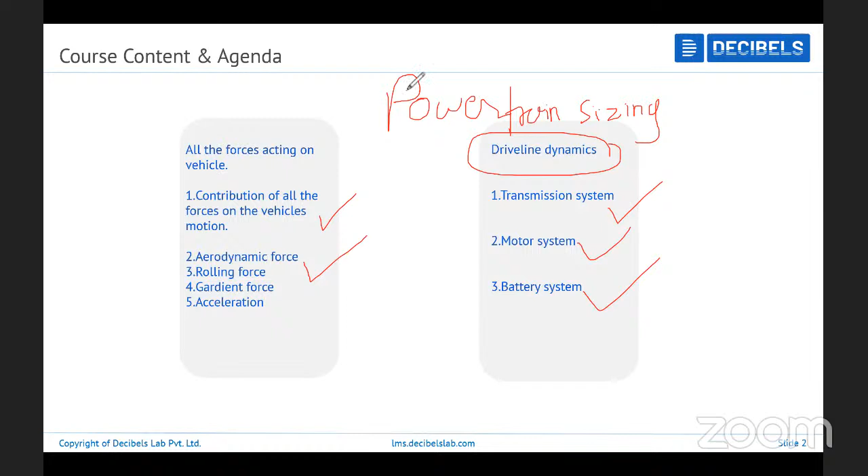So with this, just go further. So here, there are so many different approaches, what I'm going to... hello, sorry.

So if you talk about the sizing of the powertrain, there are many approaches. Here we'll be discussing an approach called wheel to well analysis.

So this will be like your wheel side. You can see this particular block diagram. This is whatever the vehicle longitudinal dynamics, this is nothing but at the wheel side. This is your source.

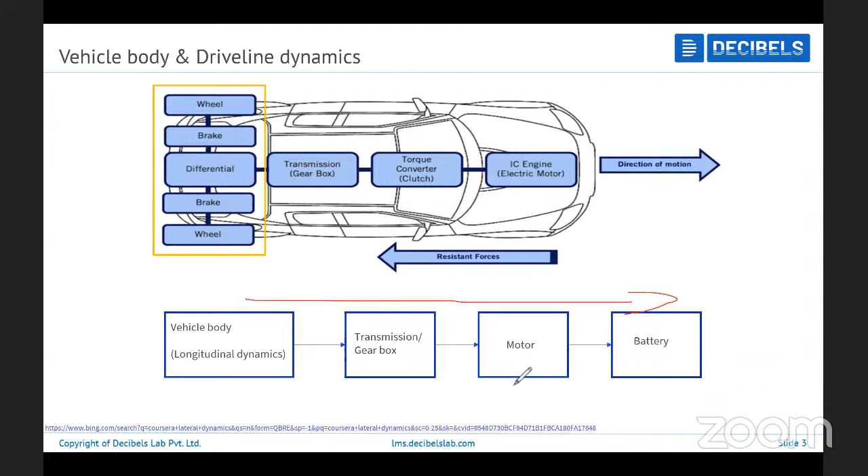So this is like a backward approach, you can say. So getting to know what.

So there are some basic derivations of the equation, related to the vehicle, that will be vertical, longitudinal and lateral. But here we only discuss longitudinal, because we are just concentrating on the front and back motion of your vehicle, in one direction itself. We won't be concentrating on turning and all that stuff.

So here this is a basic equation, we're just balancing the forces. With the help of Newton's equation, that is F equal to m into a, we'll be deriving the whole thing. So if you see this particular equation, this is your required force, and these are your resistive forces. So with this we can get to know what is the required force. I'll be discussing in detail what is aerodynamic force, gradient, rolling, all this stuff. So don't worry about these particular equations for now.

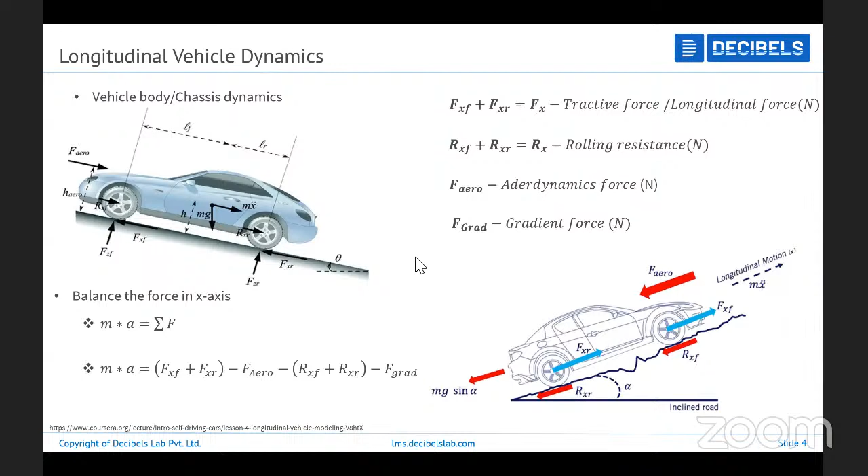So we just discussed what are the forces acting on your vehicle. So how are they going to contribute, in what percentage? We'll just look into it. So if you see this particular pie chart, you can see 45% of it is contributed by the aerodynamic force, some tire rolling which is nothing but rolling resistance, and the rest others. So the major contributor is the aerodynamic force itself.

And you can see the force versus the vehicle speed. We have mentioned rolling resistance, aerodynamic forces, all this stuff. We'll look into this graph in detail.

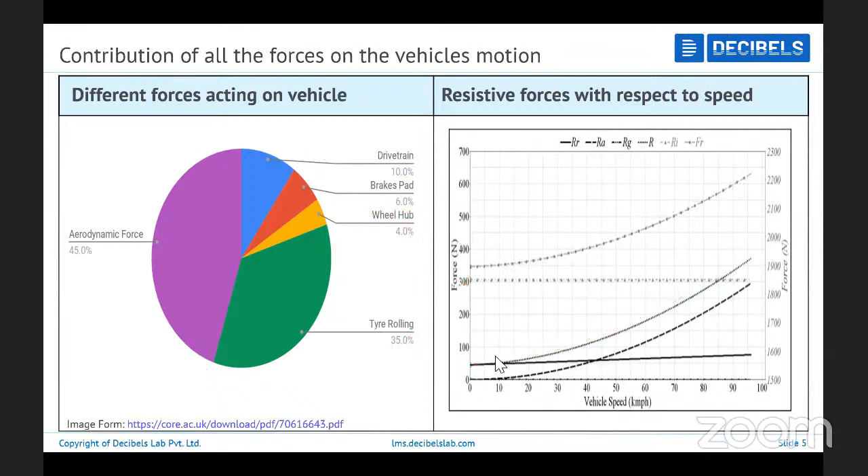So here, we'll start with the rolling resistance. We define it as a kind of resistance we encounter when a surface is in contact with your wheel.

So what are the factors affecting rolling resistance? There are many factors, like tire pressure, which is going to affect it. This is because if you don't maintain the proper pressure, let's say the tire is completely flat, so if this is the width of your tire...

Some millimeters, let's say. So if this is the width of your tire, and the tire is completely flat, the whole part of your tire is going to come in contact with the road. So the contact area between the tire and road surface, in terms of width, is going to increase. This is how you have to maintain the tire pressure, or how it's going to affect the rolling resistance.

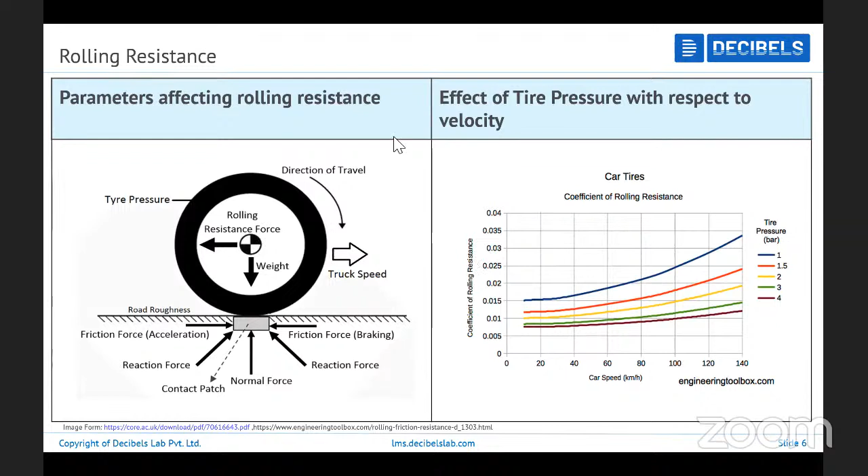So we discussed some parameters: one is the design of your tire, and weight is also a parameter - even the weight matters - and the tire pressure, and one more is the material, the surface material, and the temperature.

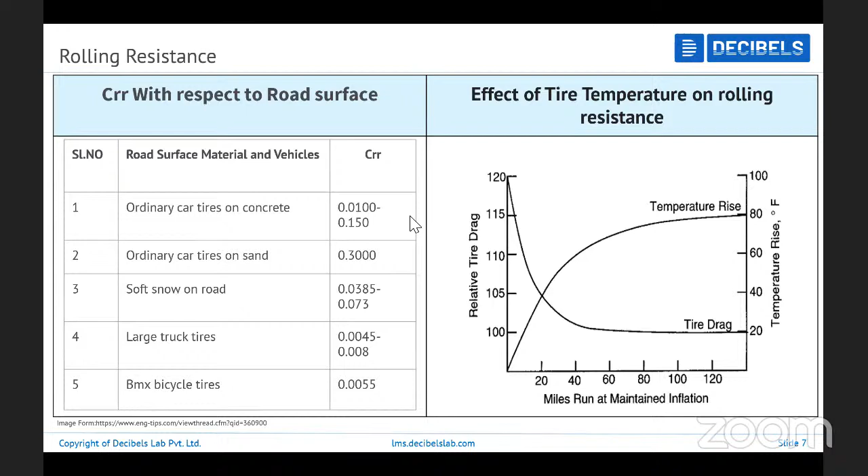There's also the material of the tube. Earlier we discussed the road surface material, like concrete, sand, road. Here you can see different materials of the tire tubes.

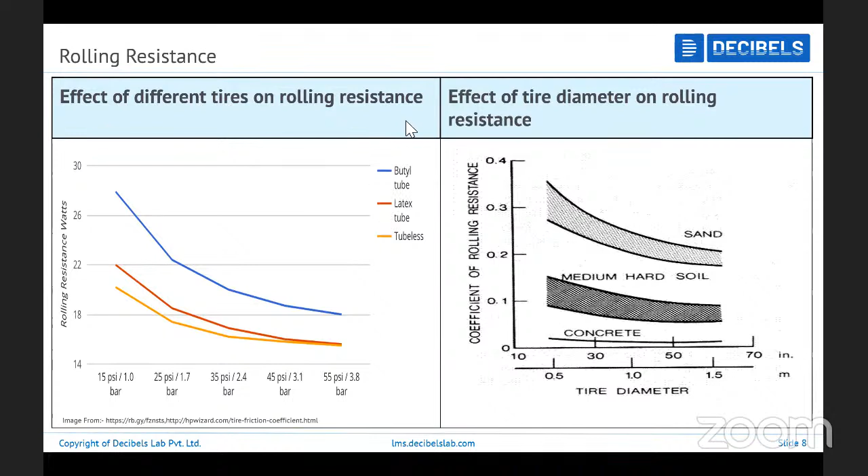Here, GVW is nothing but gross vehicle weight, which includes gross vehicle mass multiplied by acceleration due to gravity.

Gross is nothing but vehicle mass plus driver or passenger mass. If you include the driver and passenger mass, it gives you gross vehicle mass, and if you multiply the gross vehicle mass with acceleration due to gravity, you get gross vehicle weight. So for the gross vehicle weight, you are going to multiply...

...the CRR value, that is the coefficient - this is the constant term in the generic equation. In reality, this varies with respect to the tire pressure and the velocity at which you are moving. You can see other equations where it is dependent on pressure and velocity, so it depends.

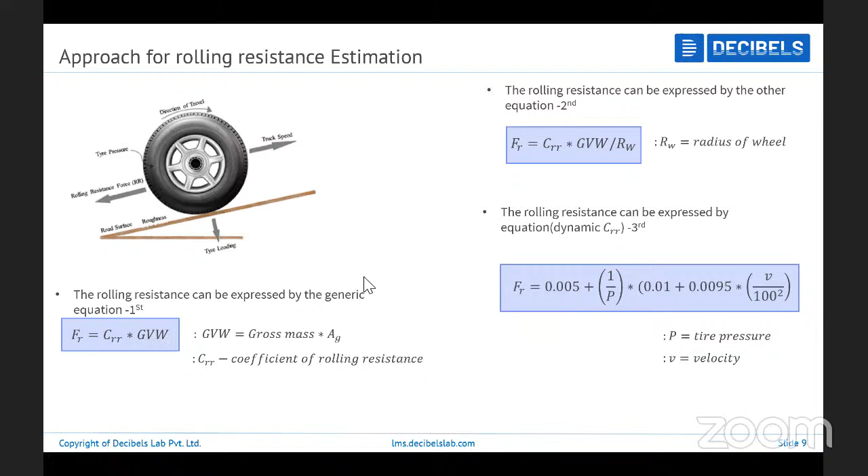So let me clear all the diagrams. Now, like one resistive force, let me write it here itself: rolling, aerodynamic, gradient, and one more, acceleration.

We'll just look into how we can make use of this. So we have just looked into the rolling resistance, defined what is rolling resistance, and also defined the parameters affecting the rolling resistance. We also looked into the equation, how we can estimate or calculate the rolling resistance. So the same thing, we are going to look for aerodynamic force itself.

Okay, let me clear. So we'll start with aerodynamic force. If you want to say what is aerodynamic force, how it's going to affect your vehicle body, or how it's going to act as a resistance force to your vehicle, we'll look into it. So we'll come back to these equations later. We'll just try to look into some parameters.

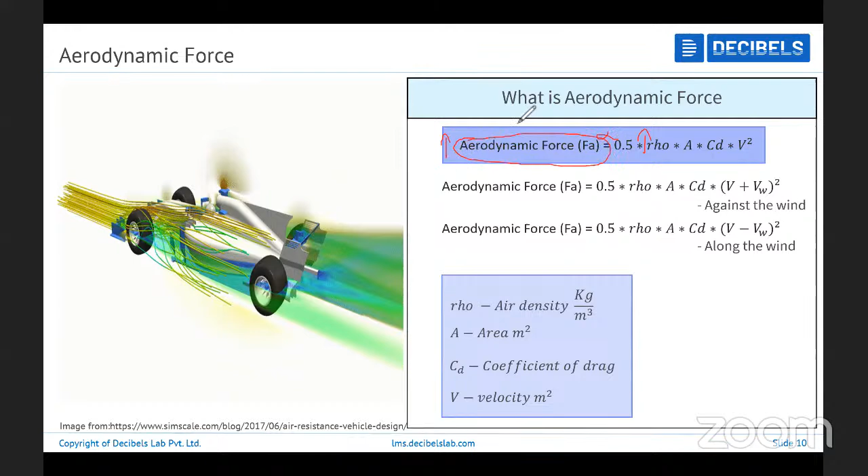So we just look into the factors affecting aerodynamic force. One thing I need you guys to note here: all the parameters are directly proportional to the aerodynamic force. So if any one of the parameters increases, obviously the aerodynamic force is going to be influenced.

So here the parameters, first we'll talk about drag dependencies. We were discussing CD, that is coefficient of drag. So coefficient of drag will depend on your vehicle shape. Here there are some general shapes, so for different shapes you can see what the drag coefficient will be. Whenever we talk about a vehicle, or a plane, a rocket, all those bodies are almost a streamlined body, or like a streamlined half body kind of.

The purpose of a vehicle manufacturer going for the streamline shape is because of having a very less drag coefficient compared to other shapes. So if you look into some high performance car, the drag coefficient will be very less. If you look at some lorries or buses which are having an almost flat surface, you can see the drag coefficient will be having a higher number. So it depends on what shape we are going to make use of for the manufacturing. And the velocity is directly proportional to the force; in the equation we see that all the parameters are directly proportional to aerodynamic force.

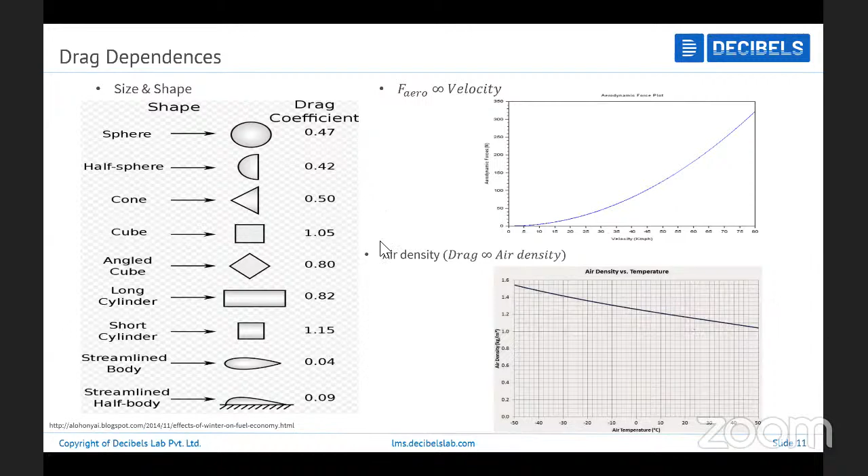So again, in the drag coefficient, there are some different types of drag, like skin friction drag, pressure drag, interference drag. We can take this as your assignment part, just look into what these things are.

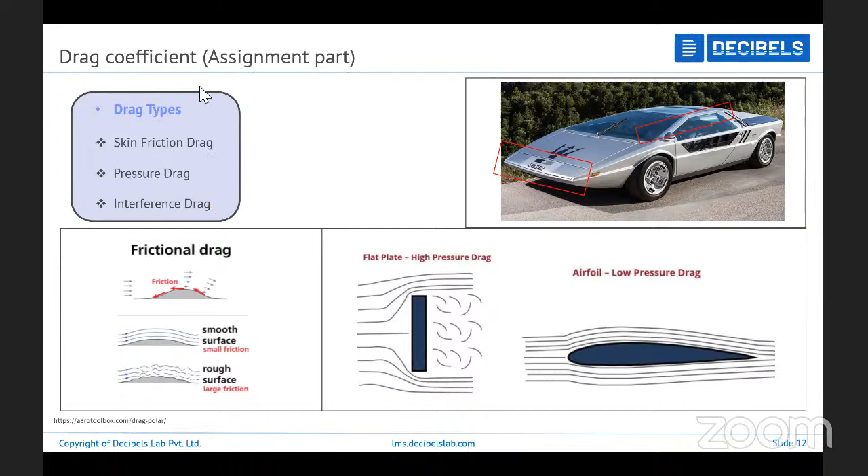Just quickly move to the next part. So as I was discussing about how to estimate the CD value, we know the equation for aerodynamic force, that is 0.5 rho CD frontal area, and transferring all the parameters to the LHS, it will become CD equal to AF divided by 0.5 rho, frontal area and V square.

This V square will be the velocity of your vehicle for this instance. In some tests, a kind of wind is blown over the surface of your vehicle. Now these parameters - rho, frontal area and aerodynamic force - are fixed values, and with these values we are going to estimate the CD value, which is non-dimensional, dimensionless. So this is how they make use of it.

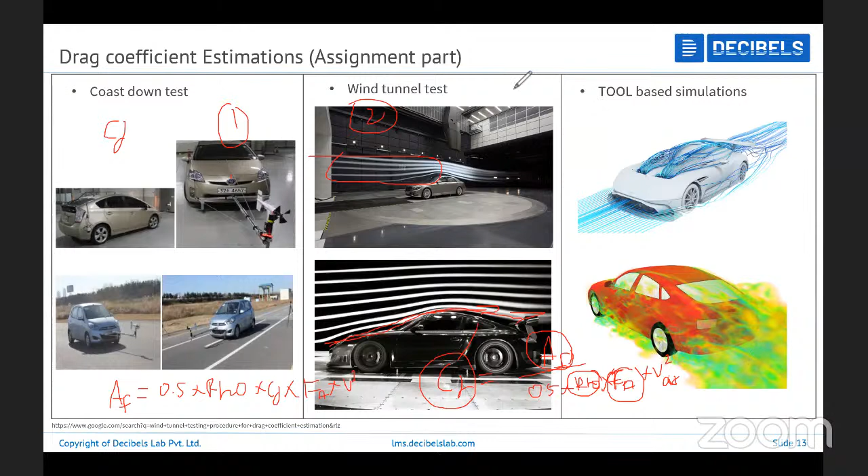These two are real-time, and this is completely on the tool base - CFD simulations will be considered. So as I was discussing the equation, just make a note of this particular equation which we'll be using. Don't worry about these equations.

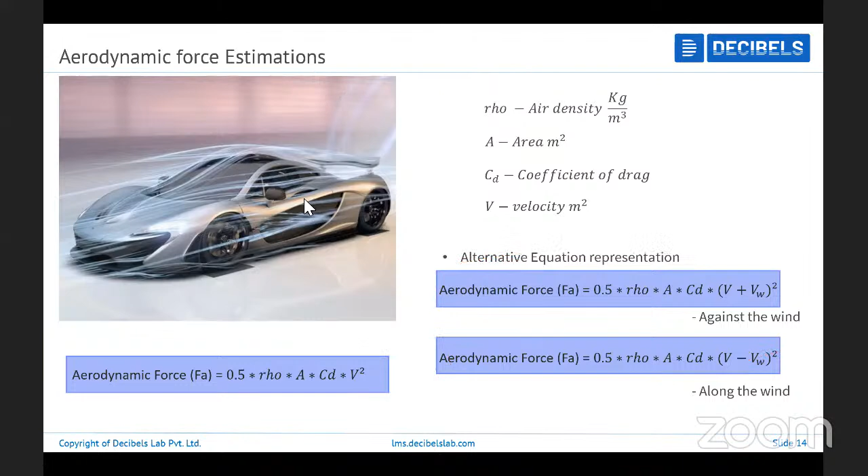Now if you talk about gradient, as I mentioned, if you're moving on a flat surface, minimum effort has to be put by the vehicle. If there is an inclined road, we have to put in more effort, because it will become against gravity with an angle.

So for your vehicle, if it is on a flat road, the weight will be completely with 90-degree downwards. Again, if you are on an incline, it has to be resolved with some angle - that's where we make use of it. This is how we can define the gradient, so just look into that equation.

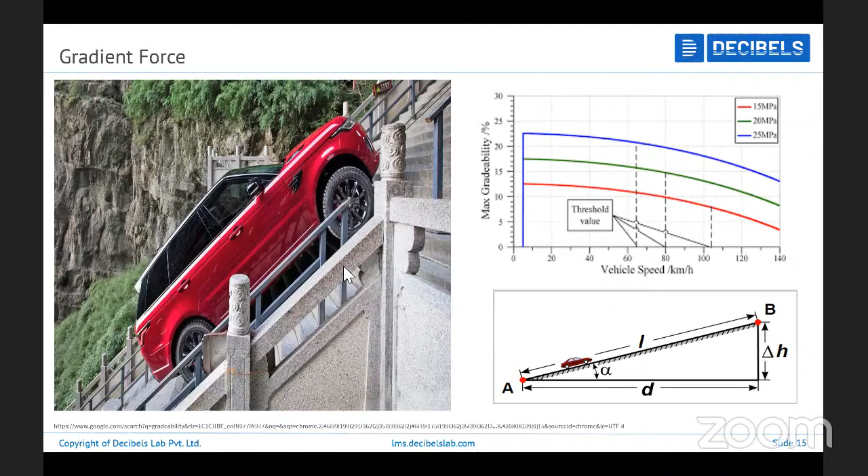Before going to ARAI standards requirements, just take a look here. These are mentioned in percentage.

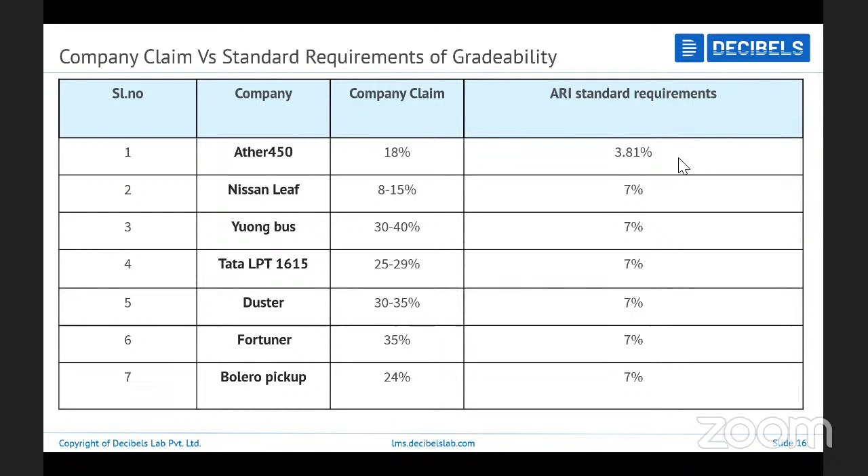If you're traveling in an uphill condition, you have to put in effort. If you're coming down, even if you don't accelerate, because of the momentum, it will keep coming down.

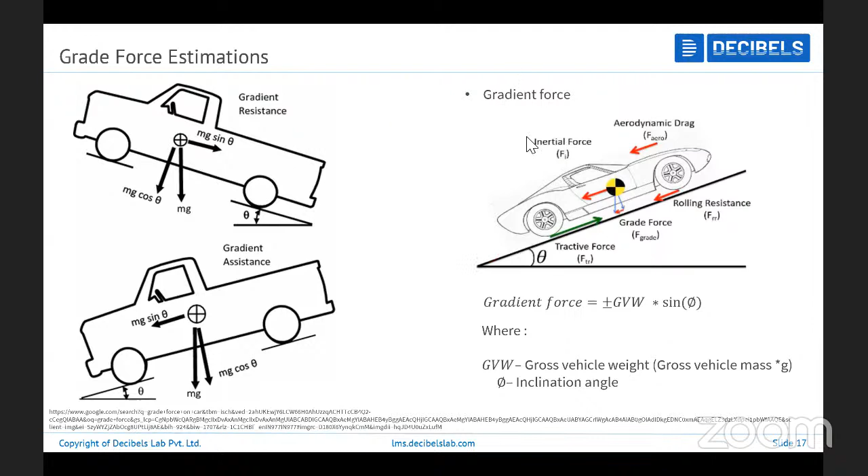So these are some set of equations. We just looked into rolling resistance, aerodynamic, and gradient. Now we'll look into the acceleration force.

So here we are going to include the acceleration force in terms of sizing. We should know how much acceleration force has to be produced. First, we have to make a consideration while calculating the force requirement.

So the force requirement has to help overcome the requirements - let's say initial resistance, static resistance, and after that aerodynamic resistance, rolling resistance. If grade is considered, then grade resistance. So first thing, it has to overcome all the resistive forces.

Next, it has to produce enough force so that it can move with the desired velocity.

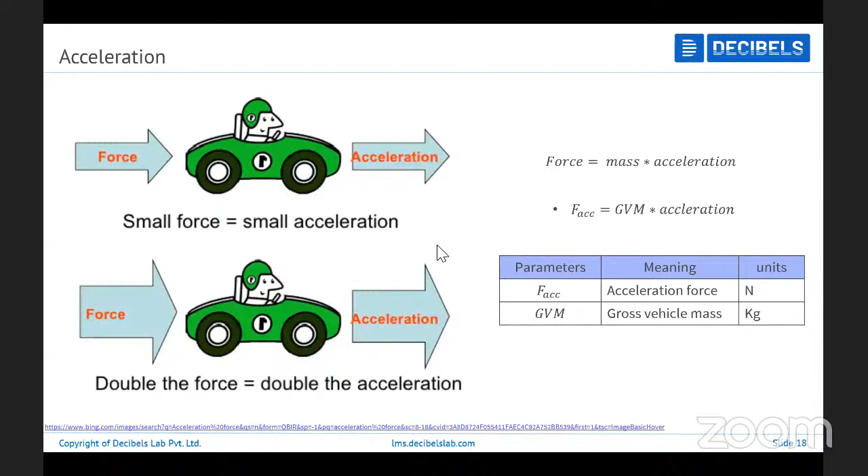So you might be thinking, what is total tractive force? Total tractive force is the total force required to overcome all the resistances, and to move with the desired velocity.

So here we are going to add all our resistive forces - F Aero, and so on - to get the total tractive force.

The total force multiplied with the wheel radius, we'll get wheel torque.

If you consider wheel to wheel analysis, you will get to know wheel torque and also the wheel speed.

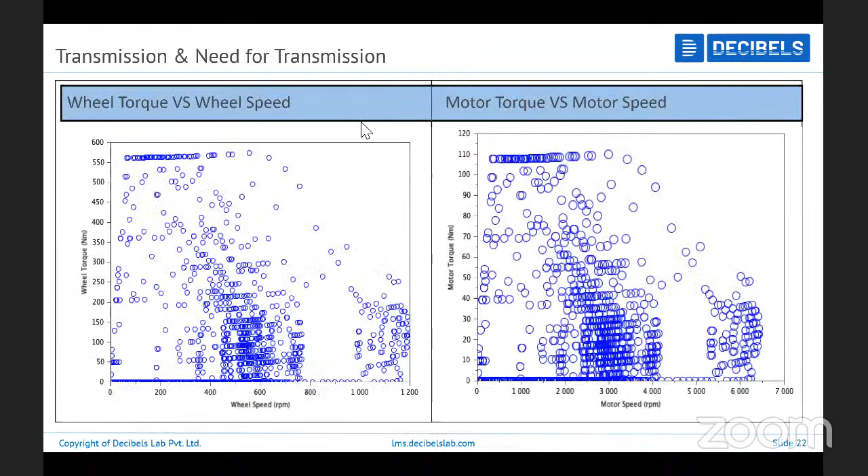So if this is your block diagram: vehicle body, transmission, motor, battery. The output of your vehicle body is wheel speed, and the output of your transmission system gives you motor torque and motor speed.

So this is transmission modeling - we use these equations. You have to size this gear ratio, and multiply with wheel speed to get the motor speed. Wheel torque divided by gear ratio, divided by some efficiency (transmission efficiency), gives you the motor torque.

So if you talk about efficiency, consider this block: from source you are supplying some power, say 100 watts. Here you make use of 90 watts, and the rest 10 watts is a loss. So this particular system is 90% efficient.

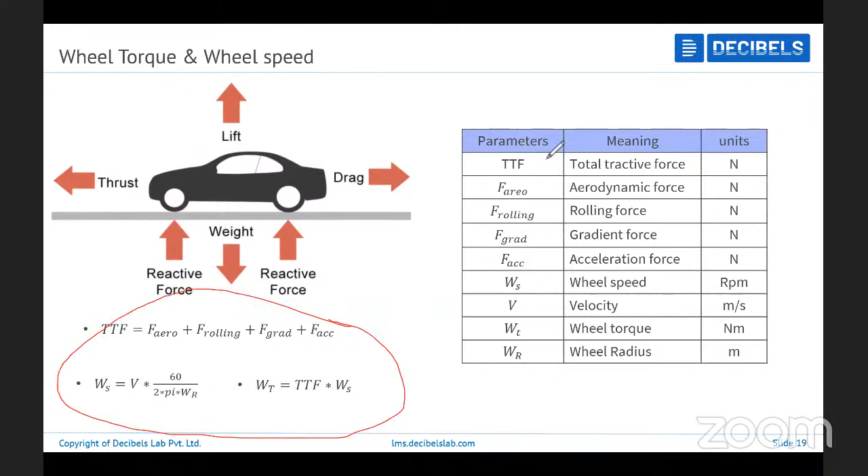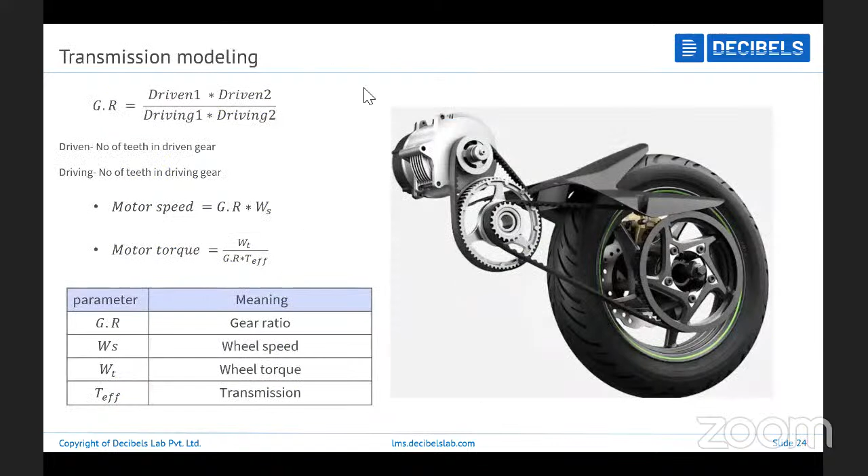Next, with known motor torque and motor speed, we can go for estimating the motor power.

So the block diagram: vehicle body, transmission, motor - here you get motor speed and motor torque, and with this you can calculate motor power.

Using the simple mechanical equation, this is your motor power: 2 pi N T upon 60, where N is motor speed and T is motor torque. The 2 pi upon 60 is just for conversion to RPM. So here you get the motor power.

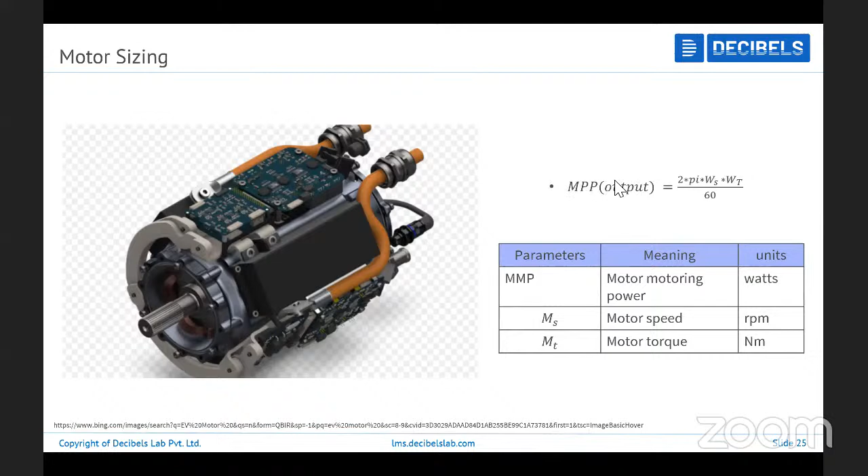Let me show you here. With this equation, you are going to estimate the motor output power, and later knowing the motor efficiency, divide the motor power with the motor efficiency to get motor input power. Then motor input power divided by motor controller efficiency, you will get battery power. So this is about the component sizing, basic equations you can say.

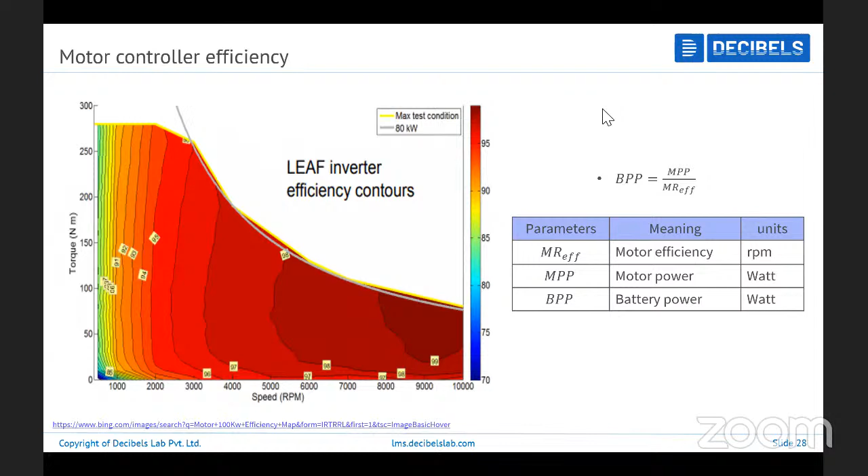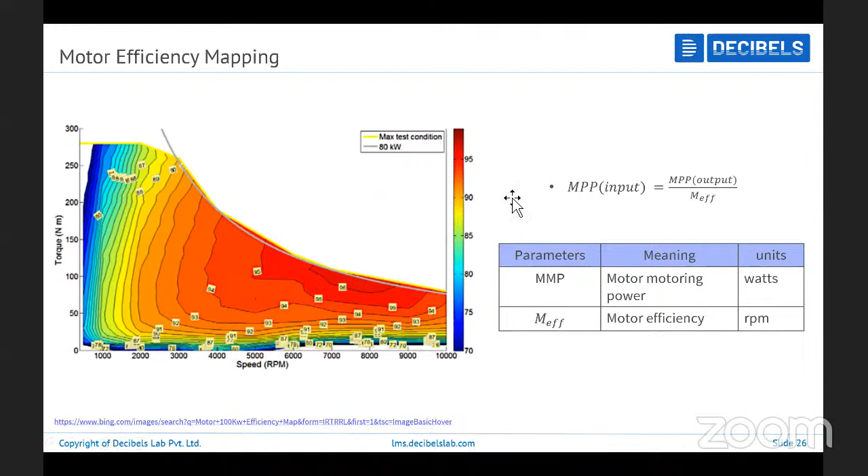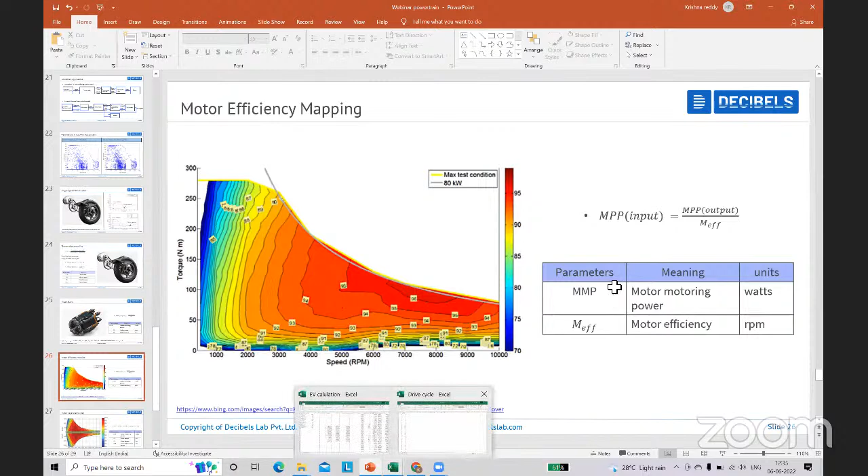I'll quickly go to the calculation part. I hope you guys have received this file. Considering that, I will just go on solving some parameters here. The equations which we just now went through, we'll be using the same equations, we'll try to import that equation here and represent it in Excel sheet format.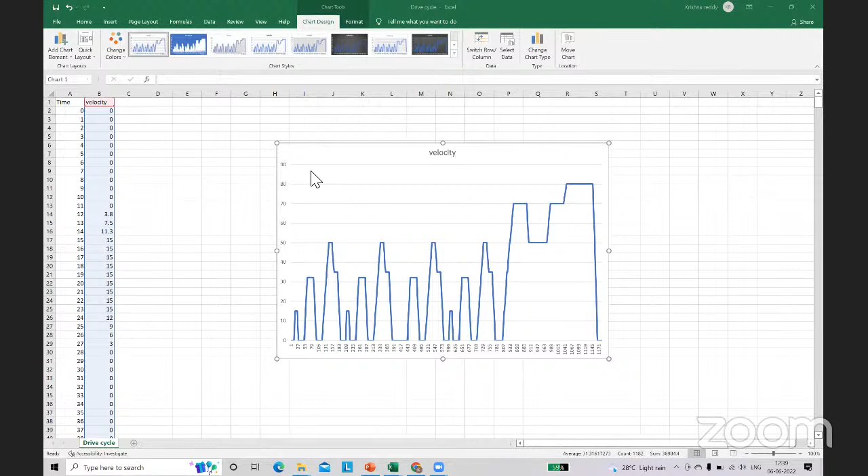So using one particular velocity, we can estimate the energy required, like motor size and motor torque. We can also calculate speed. But if you want to include the varying speed, you'll have a varying motor torque and motor speed, so from that we can get to know the continuous torque requirement, the peak torque requirement, and the mean torque requirement.

So what I'm going to do is quickly put some vehicle parameters here. Input parameters, values.

I'll be considering V mass, that is vehicle mass, 191. Driver mass, 70. Wheel speed, so wheel radius, 0.1524, in meters. Mass and driver mass are in kg.

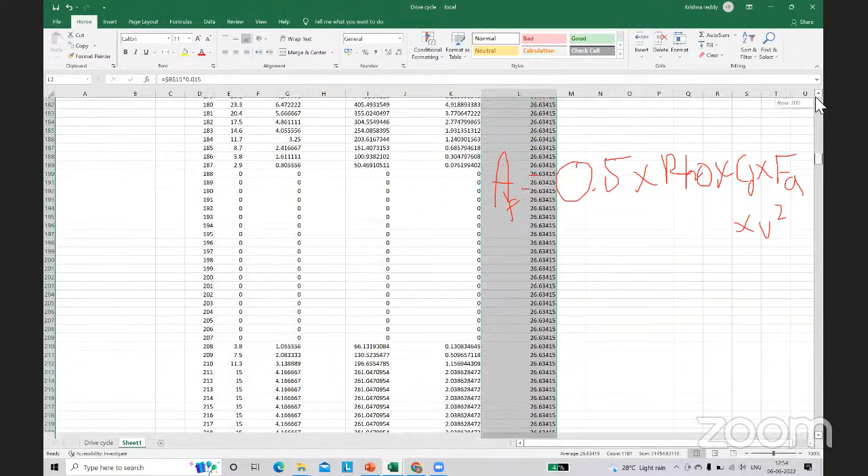Okay, let me bring like gradient. It will give you 0 because we have considered gradient angle as 0. So we know GVW multiplied with sine theta, so it will be in radians, later convert. So whatever the angle is, 0, sine 0, you will get 0, right? So multiplying anything with 0, you will get 0 at the end. So gradient force will be 0.

Including here, like adding the 0 to some number doesn't make any sense, so we'll just try to neglect this one. Now we'll try to bring acceleration force.

So we should be knowing how to calculate acceleration from the velocity. If we define what is acceleration, it is a rate of change of velocity, meter per second square.

So if we define, let's say v2 minus v1 divided by t2 minus t1, this gives you acceleration. Multiplying with the m, we get acceleration force.

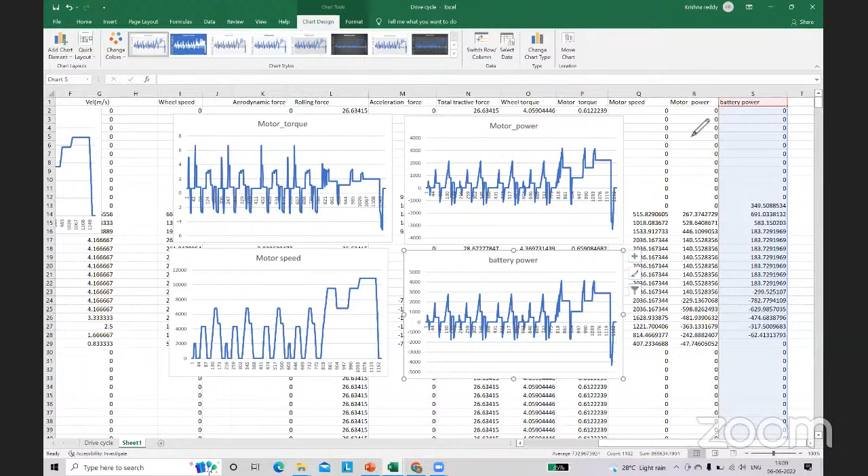So here you can see how the torque characteristics are. We know torque is directly proportional to the acceleration part. So if there is a lot of load, in initial conditions a lot of torque is needed. As the speed increases, the torque will also decrease in the vehicle.

So this is your motor torque requirement, and this is your motor speed requirement. You can see, based on the torques and the speed, there is a motor's power. At higher RPM of your motor, there is a high power requirement based on RPMs and torques.

You can see what kind of power or characteristics are required. People might be wondering what these negative parts are. Let me show you that.

So in the acceleration part, this acceleration force - from the velocity we derived the acceleration and then multiplied with mass. That is a constant value, so let's consider it's acceleration. If the velocity is constant, your acceleration will be 0. If your velocity is increasing with some rate, that will be your acceleration, and it will be on the positive side. If your velocity is decreasing, then it will show you the deceleration.

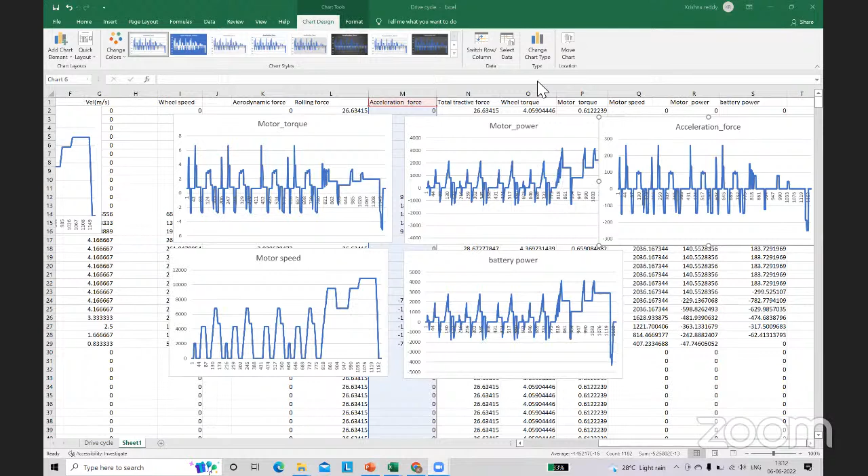Let me bring the velocity. So if you see your velocity graph, you can compare - when there is an increase in speed, you can see the spikes. You can try to compare that in the decreasing phase, you can see the fall.

The same thing you can see with this one - there is an increase in speed, and with respect to time, there is some spike in the motor torque, and the same thing here in the completely decreasing speed, there is completely negative torque. So if you talk about acceleration, it repeats the same pattern of graph.